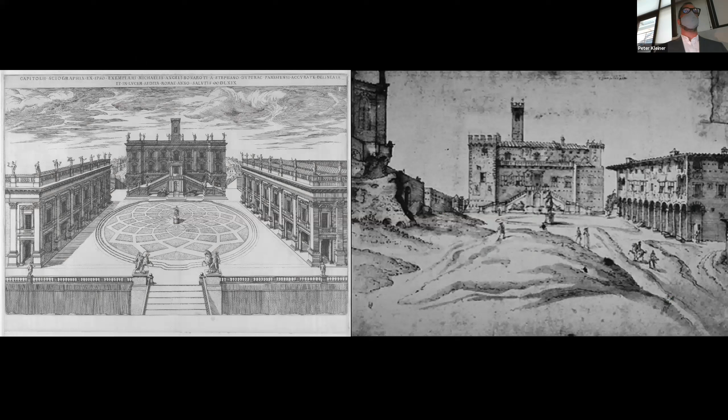Some quick internet research reveals this concept isn't new. Apparently Leonardo had a similar thought, or maybe it was Michelangelo—the internet hasn't decided quite yet. But my money's on Michelangelo, and even if he didn't say those exact words, he did it in almost all his work. Whether creating an illusion of a perfect Renaissance environment at the bizarre existing buildings of Capitoline Hill, or creating one of the most memorable staircases in a leftover space in the San Lorenzo complex, or creating David from a block of marble rejected by other sculptors as unworkable, he's truly one of the greatest architects in history.

He knew the constraints of budget, site, existing buildings, and client vision, and how to make those constraints truly great art. So there are seven themes we're going to review tonight: site, existing buildings, budget, process, sustainability, regulations, and program. So let's start with site.

We encourage everyone to always draw the context. If you don't design with your site, your design is incomplete. In fact, it can really be the key to your whole project—if you don't have a spectacular cliff in Capri, that is.

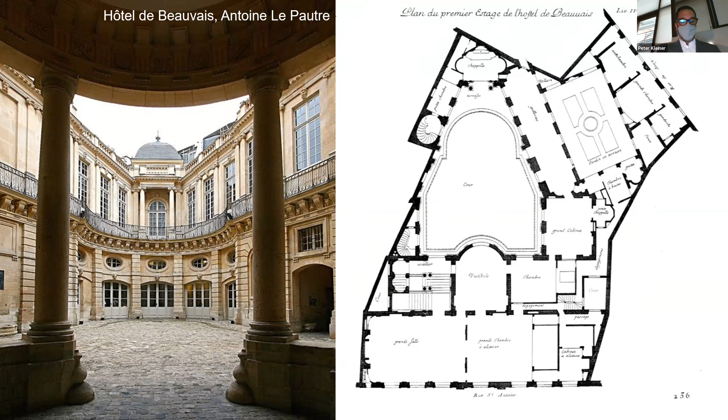Even odd sites are a great opportunity for design. The Haussmann plan in Paris created dozens of odd-shaped sites throughout the city, and Antoine Le Pautre's plan uses that odd shape as the driver to create brilliant architecture.

While we're in Paris, we wanted to focus on the Maison de Verre, one of our favorites, by Pierre Chareau. The site is small, within a courtyard, fairly concealed from public view, but it contains one of the most memorable pieces of architecture from the early 20th century. The constraint was that it was in an apartment building, but they didn't own the top floor, so they had to support that floor during construction.

The MIT library, one of our earliest projects, was in fact our second built project. It was for the art and architecture library, and it was driven by the constraints of the site. After an exhaustive search for a site on the MIT campus—something like 17 studies—the best and only preferred site was the one on the facade of the architecture building.

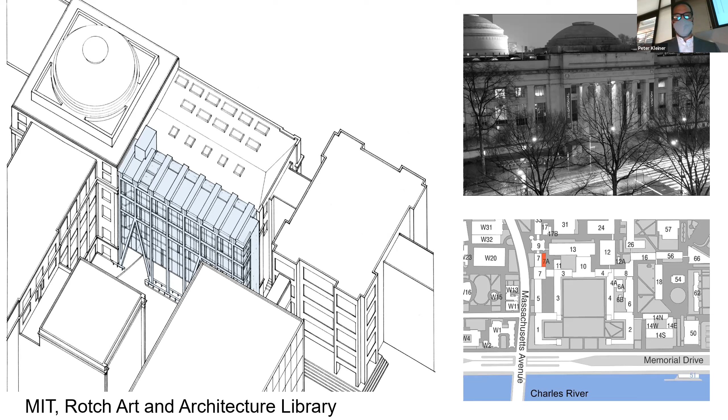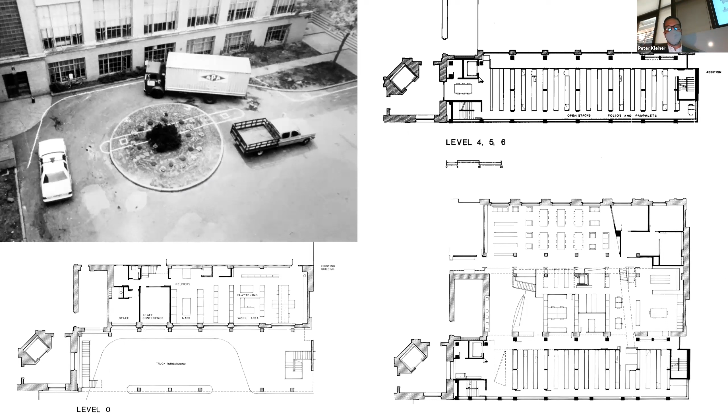That site turned out to be the service and delivery zone for most of MIT's connected buildings—the truck turnaround MIT used for deliveries for everything going on there. I don't know that I knew MIT had a football team, but they actually did ask the coach and his team to draw in chalk where the building would come down, to see if it would actually work. It did, so they went forward.

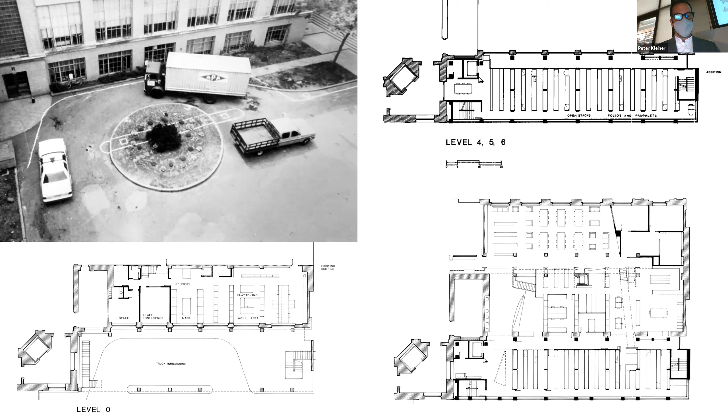The site's located at the rear of the domed main building on Mass Avenue. It's the smaller dome of the two, and the design had to keep this path and truck turnaround open after construction was complete.

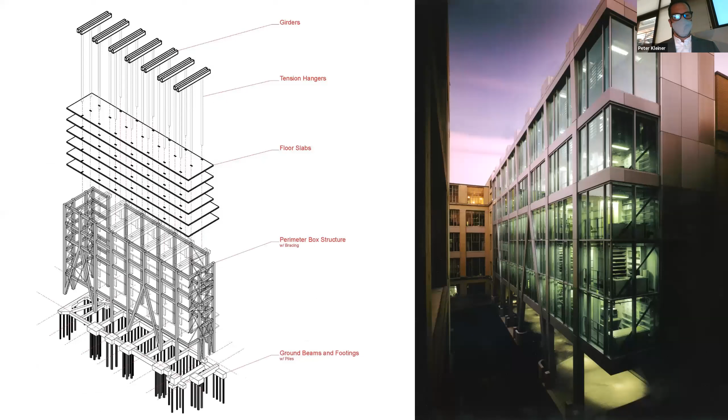When we thought about it, the building had no other site per se. We thought if we could hang the building from the roof with only a few columns touching the ground—something like 10 locations—we could solve the problem and maintain MIT's treasured delivery zone. So the solution became a quasi-suspension bridge.

Another project I'll talk about is the McCoy Federal Building. There are many unique aspects of this project, but I want to highlight some of the constraints of the site that really drove our design.

The existing building had an unwelcoming civic plaza in front that eroded the edge of Capitol Street, the main street in downtown Jackson, Mississippi. Our new entry pavilion was to reestablish that edge of Capitol Street, create a contrasting architecture to the harsh existing federal building, and create a more welcoming landscape.

This site area we had was in fact very small, and the pavilion was a small part of the project, which was a full renovation of 425,000 square feet of the federal tower.

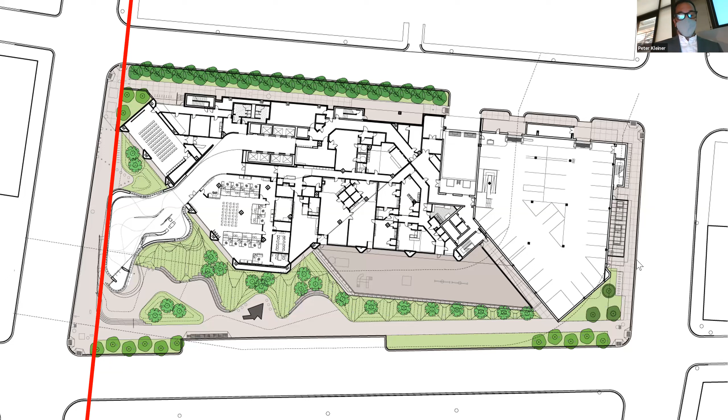So not only was the site small, but there was another catch. The Army Corps of Engineers had a stormwater culvert that ran through the entire site, diverting a tributary of the Pearl River through the downtown.

Early on, we did an analysis and determined that a small column could rest on a center bearing wall, and the existing capacity of that storm culvert could easily support that column—about 3 kips, not a big load.

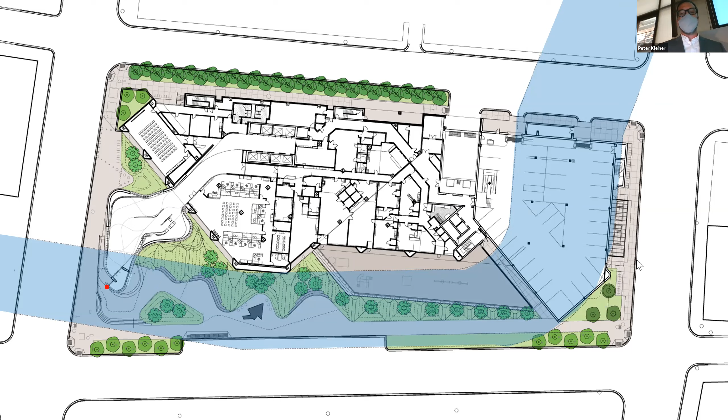During construction, we were advised that the federal government was not going to seek approval for that column, and we didn't have it. So we had about 30 feet of our pavilion left unsupported.

So the contractor had a brilliant solution. He said, just cut it off and redesign the pavilion.

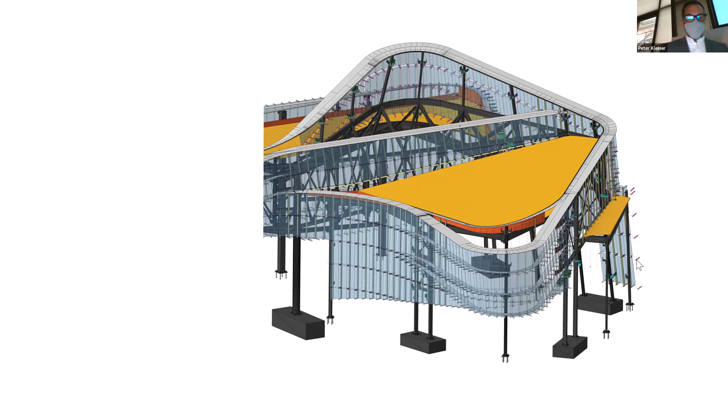So we sat and thought about it, and I looked at the framing model and called our structural engineer, Anton Nelson. I said, Anton, I paid a little attention in my structural engineering classes, and I'm pretty sure this truss we have is really only about a third of the cantilever for the full backspan. And furthermore, this whole thing is welded, so it's a full moment frame. Can't we basically treat this like a race car chassis? It's a welded frame—we just have to support it up a few dozen feet in the air.

So like a good engineer, he listened to me, then told me I was absolutely insane and hung up.

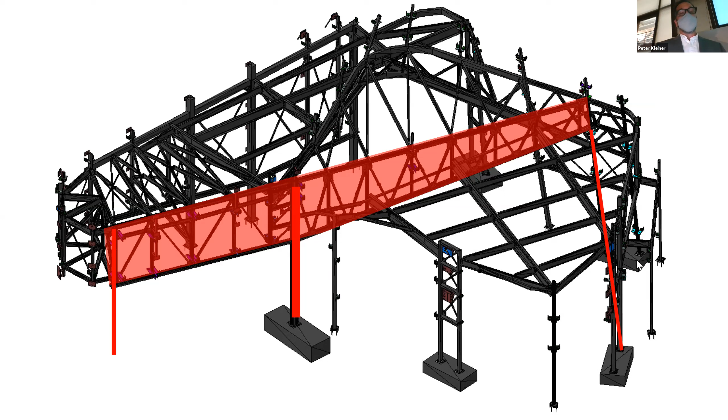But like a truly exceptional engineer, he called me back and said, you know what, I looked at it and your idea works. What we can do is use this wall on the other side too, to reinforce and make that a truss so we can fully support this 30-foot span without that column.

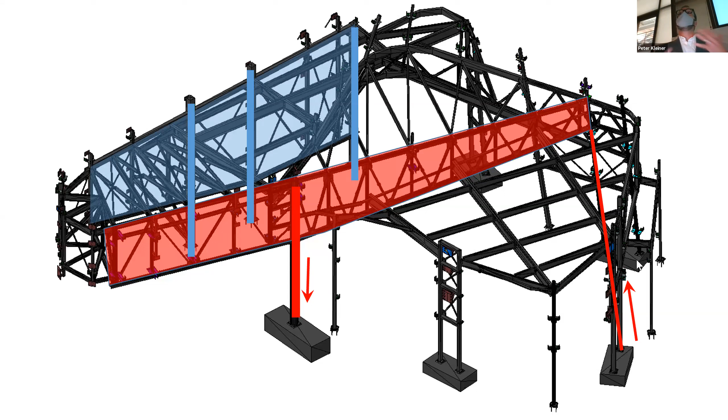In fact, we're not actually increasing the load of steel. Some of these columns are actually going to act in tension because of the overturning of this whole roof form during certain wind conditions. So the project went ahead—built as originally intended, just without a column.

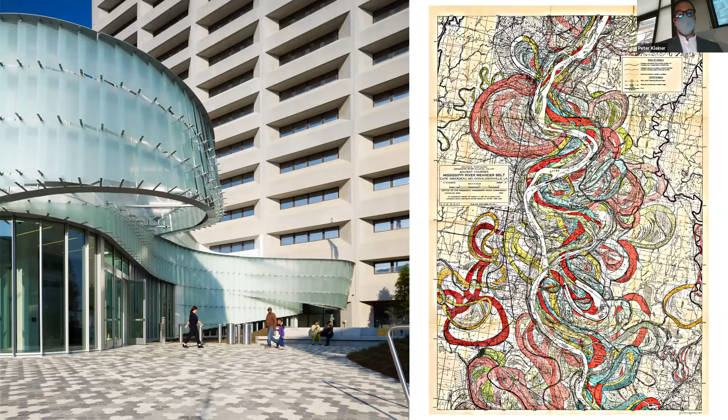It's something that we're very proud of.

And in fact, there's another aspect of the site that we used to provide inspiration. As we were designing it, we found these beautiful drawings done in 1944 showing the changing contours and meanders of the Mississippi River over geologic time. We used that as inspiration, noting how the river has been around for millions of years and yet still hasn't figured out how to go in a straight line.

It constantly changes and weaves its way around obstacles, and somewhere there's probably a metaphor in there for the federal government, or maybe just our design processes.

So much of our work at Schwartz Silver is to existing buildings, and we are really well known for transforming existing buildings.

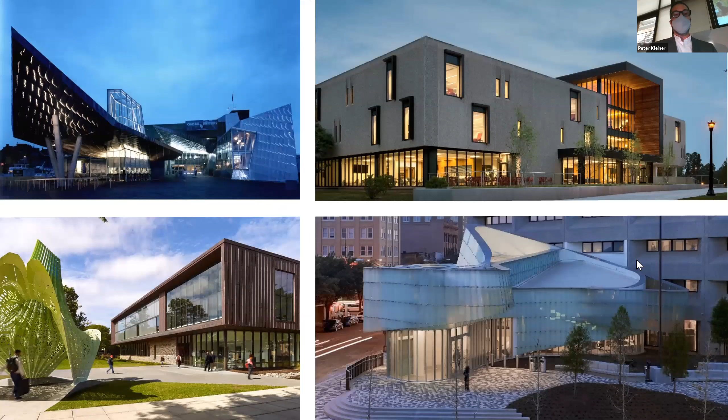There will be, in your careers, more existing buildings to work on than new construction. So it's a good thing Roger has a robust historic preservation program.

In many cases, we work on buildings by famous architects, such as H.H. Richardson, Charles Bulfinch, Guy Lowell, or in this case, McKim, Mead, and White at Brown University. Our philosophy has always been to respect the inherent character of these existing structures and then look for opportunities to add a layer of history with new modern interventions.

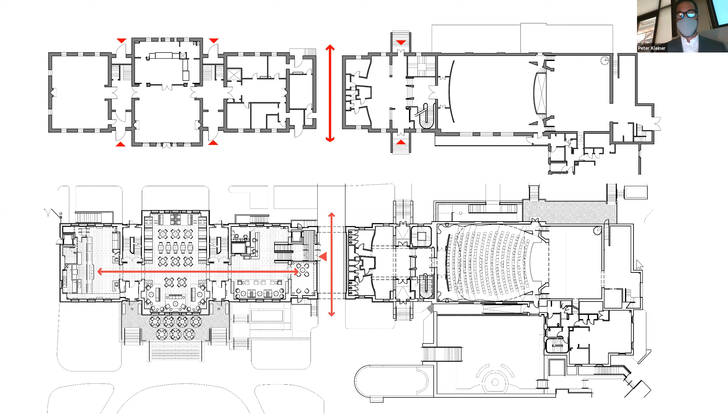At the campus center, by keeping a suite of spaces enfilade, we shifted the axis in the existing building from the center line to just off center. And this allowed us an opportunity on the other end to change the way we could experience the building on campus.

This is one of the main entrances to the Brown campus, and there is a connecting path right through the center of the building, which before we started was an unremarkable brick arch passageway. We saw this as an opportunity to connect the internal part of the building with a new glass entranceway, and therefore transform this entrance to the building and this entrance to the campus with something more light-filled and modern.

The Historic Preservation Act was created in 1966. It protects buildings that are 50 years old and older. And with some irony, we're now at the point of protecting some of the most divisive designs that were the reason for that act. Brutalist designs of the 60s through 80s are now historic buildings. Some people like them very much, such as us, but for most people, they consider these buildings to be ugly.

The stairway was transformed with the light monitor from above and changing some of the texture, including a mural that included quotes from a commencement speech from Kurt Vonnegut that we found very inspirational. Those dark spaces around the interior became light-filled study rooms and collaboration spaces for the new library.

So budget is something that we have to focus on in all of our projects, and it's something that is not often talked about, we feel, but it's something that is really critical to making your projects succeed.

So the National Music Museum is a project which has been in the office for almost 12 years. Architecture is not for the impatient.

The museum is a small building on the campus of the University of South Dakota. It was originally a Carnegie Library. Like many things in the Dakotas, it's difficult to get to, but it has one of the most amazing collections of musical instruments in the world, something like 30,000 objects.

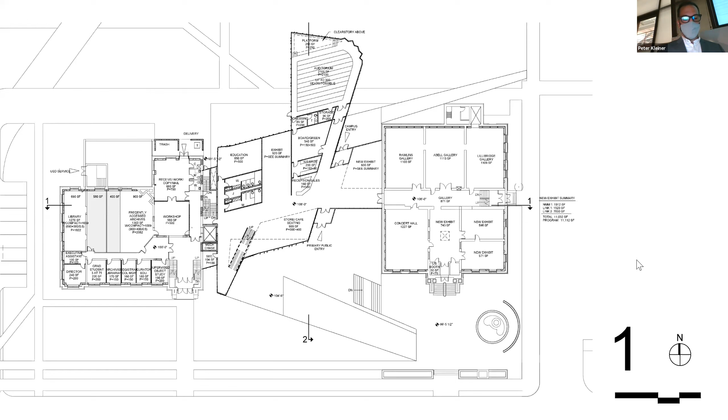After 35 years, it was running out of space. The board's aspirations were for it to be a world-class destination museum. Initially, we developed a design that would maximize the existing site by connecting to another campus building on the left. The goal was to create a design that would generate donor interest in a national fundraising campaign that would span from coast to coast. The initial budget was $17 million in 2010.

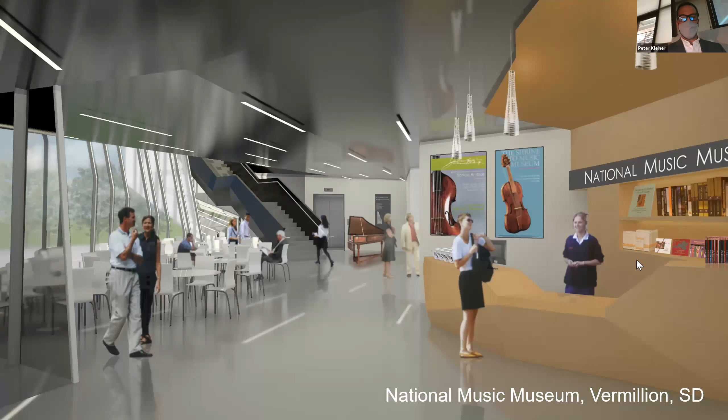But initial fundraising expectations proved too ambitious, and we simplified the design to stay within the limitations of that budget, which was now reduced from 17 million to the $4 to $6 million range. What do we do?

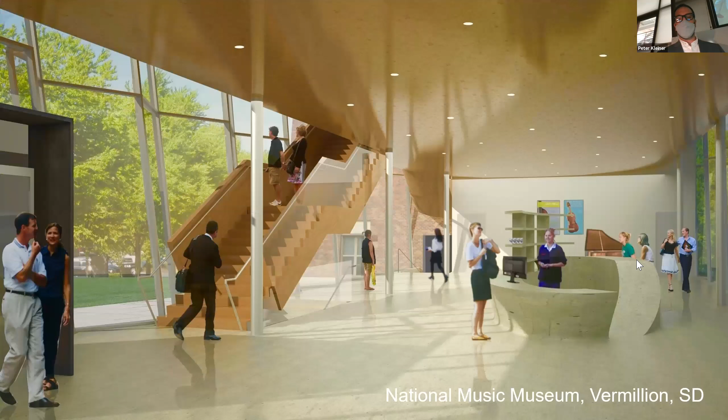Program and square footage was cut to a minimum. The building still connected both buildings on the site, but it had shrunk to a width of 21 feet. It had to become a beautiful lobby/corridor with linear galleries on the second floor.

A few more years passed. We liked it, but as it turned out, the university didn't want to build just a corridor.

So more time passed. We're somewhere around 2017 now. A new director was named, and finally, the arts faculty created a very focused building campaign, relying on money from state and federal grants, as well as a more realistic fundraising effort, with an expanded donor base and a special donor.

We had another more modest but realistic budget of $9.5 million to work with. By the way, this includes as much as possible renovations of the exhibits within the existing building.

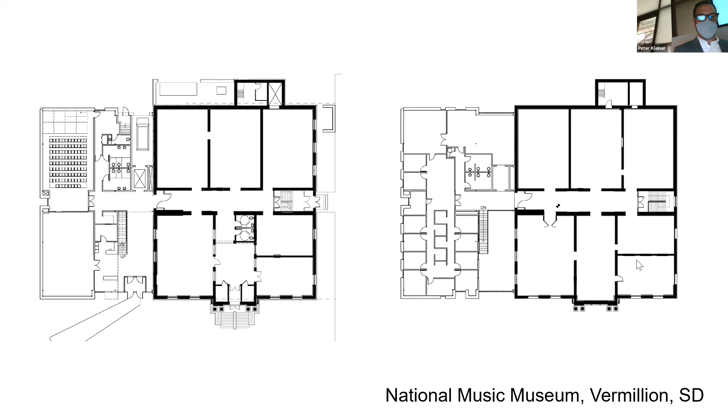10 years later, the new design was smaller than the original, but bigger than the corridor scheme 6 years out. It did not connect the two existing buildings, but instead found storage space for the collections off-site. It proposed renovating the existing museum galleries, and that's now underway. And the addition is now complete with offices, conservation spaces, a new lobby entrance, a new large traveling gallery, and a new 130-person recital hall, all scaled down from the original $17 million design, but consistent with the original program for the museum.

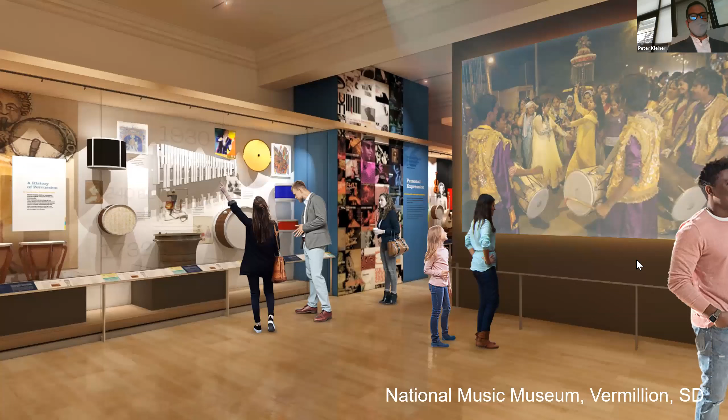That's the new traveling gallery. And actually it opens into the recital hall.

At this point, I want to pause and address the question you may be thinking: is this a disappointment? Well, 12 years later, wouldn't you rather have the original larger project in your portfolio? Actually, no. The goal is to have projects built that benefit our clients. The larger project would have been a financial burden for the institution, depleted their endowment, and kept them from their mission of preserving the instruments.

At the end of the project, all the lost designs and war stories disappear, and you have a building, and that building needs to stand on its own and be something an owner can maintain. If you don't accommodate the budget constraint, you'll only have beautiful renderings.

So in our studio, we talk a lot about process, and this is not so much the design process, but the outside forces of process that impact us. Now, as a student, you may be talking to colleagues outside the architecture program, commenting on how odd the design crit is. It's truly something unique in academia that doesn't really exist outside of architecture schools.

When I was in school, the design crit was nerve-wracking. It could be brutal and sometimes cruel. Exhausted students, hadn't slept in days, wept. And you may say to yourself, how does this prepare me for working in the office when I graduate? I forgot to tell you that the public process is worse than the academic design crit sometimes.

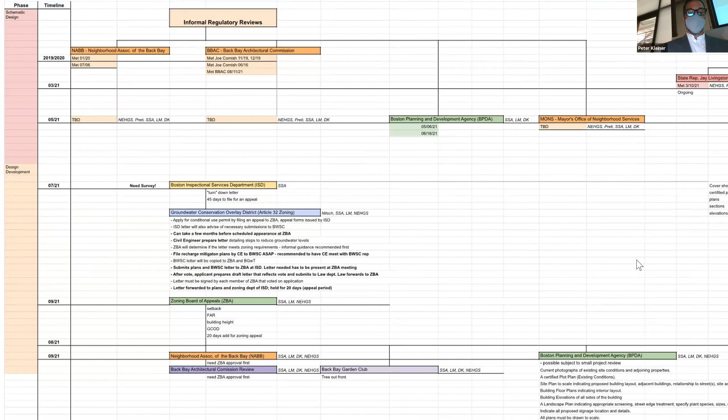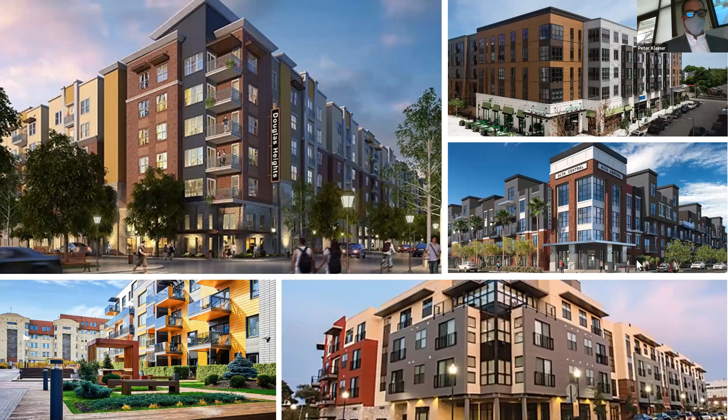There's an old expression that a camel's a horse designed by committee. And I feel that you don't have to look too far today to see many architectural camels that are the result of a design-driven process through a committee. The goal of many development projects is to get through as quickly as possible, and compromises are made all the time.

Worse, I think designs are starting out as compromises to address all the things people ask in meetings. Can you break down the scale? Can you change materials? Can you add some brick? Can you add bays and relate it to the context? I feel this is really unfortunate. I've often said you've never heard people complain that there's too much red brick in Beacon Hill. We've forgotten that we don't need to use every material in our material library, and that complicated designs are not necessary to create great architecture in great cities.

So for me, one of the first projects I worked on at Schwartz was the Hyde Park Library, a beautiful Carnegie building in a neighborhood of Boston, which happened to be Mayor Tom Menino's neighborhood at that time, where he grew up. So it was something that was very dear to him.

So very early in the process, we were evaluating 3 options. One was 2 additions on the side of this historic building. Another would create a nice garden with a new volume connected to the historic building. And the other was pretty much a simple extrusion that complemented the existing building massing. I remember a number of people in the office really loved option 2, seeing great possibility in creating this garden and this beautiful new element that complemented the existing building.

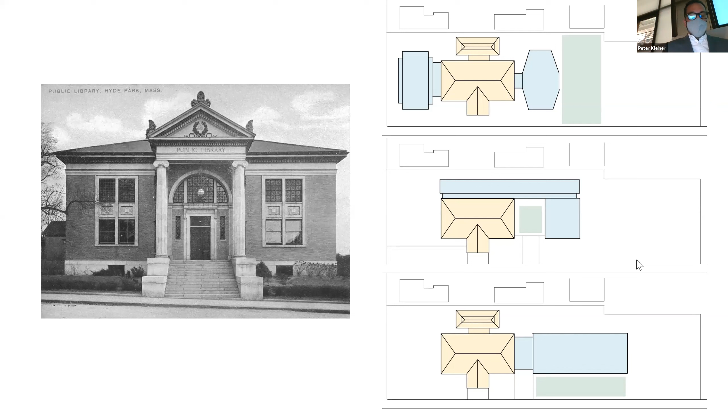One of the principals in the office said option 3 is the only option that's going to survive this process. He casually added, if the AIA had a competition, option 3 would win. The AIA awarded this building a National Honor Award, one of its highest honors. The reason it was able to be built is that it had a very clear intent for what the building needed to be, and it allowed everyone to be satisfied.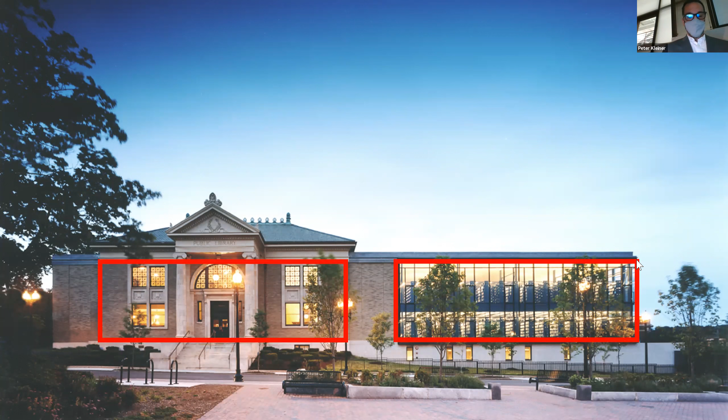It allowed a plan that could accommodate a functioning library, satisfying the needs of the librarian and the staff. The massing of the modern glass box related very simply to the massing of the existing building. The datum lines tied the existing into the new, and the windows of the existing building were related to the proportions of the windows of the curtain wall. So it was very easy to satisfy the historic commission with this type of logic.

The interior atrium space allowed the existing historic reading room and the new reading area to connect with minimal staff supervision. And ultimately, the garden that was part of the scheme, incorporated in the back, was a focal point at the end of the children's room. It's one of the best used spaces in the Hyde Park neighborhood.

Another project that went through the gauntlet of the public process is this recent project for the Medford Public Library, and it's a slightly different story. The existing library was an unloved 1960s building, and our design provided a new, efficient floor plan that would maximize the use of this site.

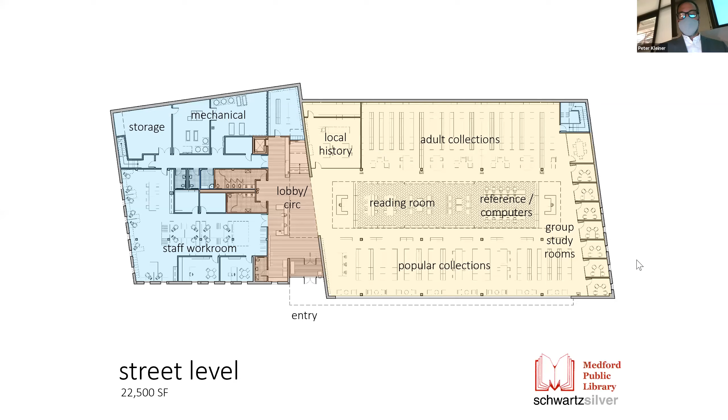During the concept phase, we had some initial concepts about how this would be formed, but it was really left to schematic design to further flesh this out. It became very clear that the committee had no love for the flat roof of the existing building, and their one request was that this building have nothing like a flat roof.

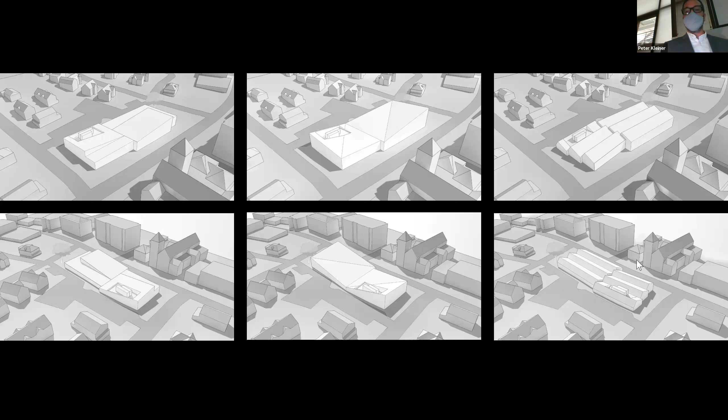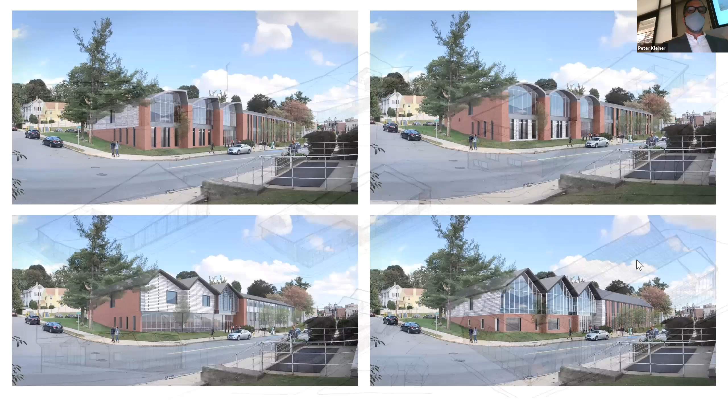So we started looking at many options for how to do the massing of this. That continued for several weeks. We wanted to look at options that included the shed roofs that were requested, as well as gable ends, but also some other forms. In the end, what we really wanted to do was create a scheme that could celebrate some of the heritage of the city of Medford, which is known for brick manufacturing and the construction of clipper ships. So the repetitive roofs started to reference some of the manufacturing buildings with repetitive roof forms, but also alluded to waves and sail forms.

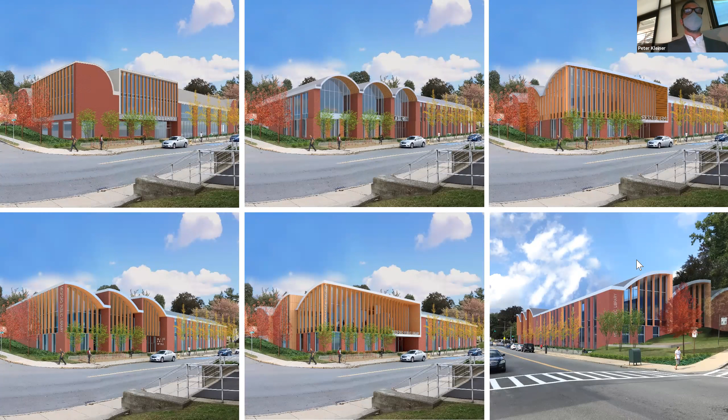Getting to consensus can be difficult. Oftentimes it takes many iterations, continually looking at and refining these options. But we created a system of roofs which creates rhythm and order on the exterior, but also allows for skylight monitors to bring light into the upper floors of the library building, providing abundant daylight.

So this is the final rendering that was developed, showing that repetitive roof form scheme of arches, and you can see some of the skylights in the interior. We're very pleased to say that this is almost completed construction, and the client is very happy with it. We're excited for that to open.

Those roof forms were also something we used to determine how to make that work for solar panels, so this library will be one of the first net zero libraries in Massachusetts, something we're very proud of. And that leads us to our next point: sustainability.

Sustainability is more and more a driving force in our projects. It's something we try to do in almost all of our projects, to the greatest extent possible, but it's rare that we have it as the primary driving issue. The town of Wellesley had that as a goal. It had a requirement for a new town hall space, and its primary goal was for this building to be net zero, so we developed this project to be net zero.

In order to do that, there are many things you have to do to make the building reduce the amount of energy it uses and actually generate the energy it needs on site. So this project has a very compact volume. It has an incredibly thermally efficient envelope, which also means you have to reduce exterior glass.

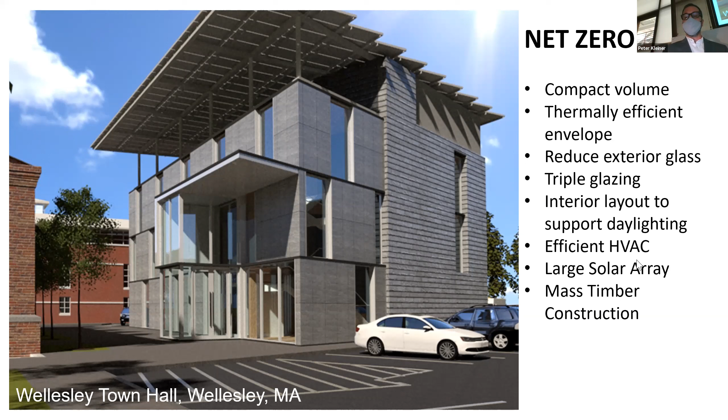But as we progressed, we decided we can go a little better here. So we can go for a project that uses zero fossil fuels in the transport of materials and zero material waste. We can work to make sure there's zero maintenance and zero operations costs, and we can have one of the lowest energy footprints of any building in the state.

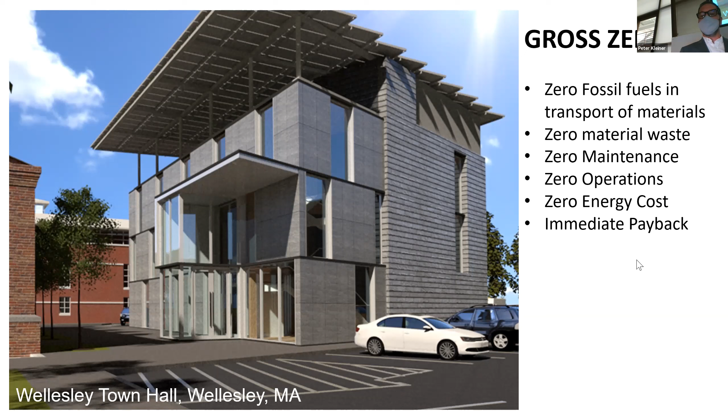The town had another town hall project ongoing at the same time, and we convinced them that we didn't need that new building, at least not quite yet. The most sustainable square footage you can build is the square footage you don't build. So we convinced them that by renovating their town hall project, which was ongoing, we could actually reduce the energy footprint of the town more than by building this net zero building.

We also analyzed the existing meeting rooms of buildings throughout the town to determine that they didn't need additional meeting space in the town. This took a very careful data analysis effort to determine the town's true needs for meetings.

And then when we designed it, we made sure that we could take this existing building, which was inaccessible, and provide accessibility. I think this is something that we find is really important and undervalued: making sure that our projects provide universal design.

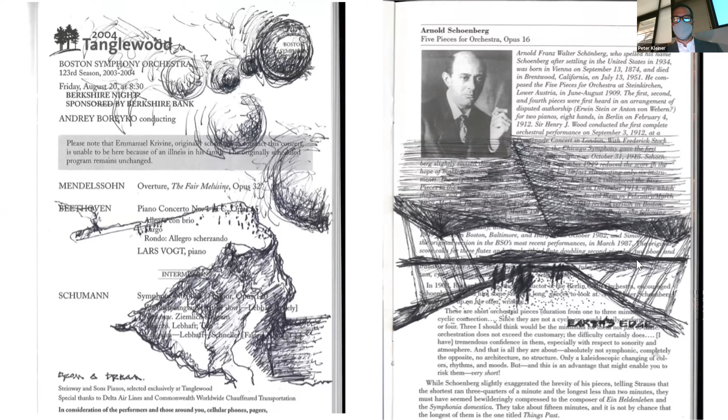So I made a quick Lego model and started working on the plans. The house was to be entered from the top of the hill and would be held up mid-span by a stairway toward the ground.

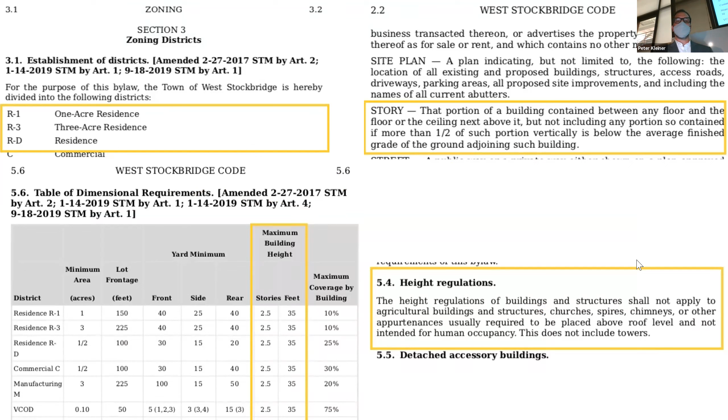I then looked at the zoning regulations. The height of the building was limited to 35 feet. And although I thought of the house as only one story, that was not zoning's definition. The hill was sloping quickly, and the height to average grade would have been over 10 feet higher than the zoning allowed. The design had to be rethought.

If the upper half of the house could follow the slope down the hill, then the lower half of the house could still stretch out horizontally and become the living, dining, kitchen, and main bedroom platform. The height of the structure could be 17 feet, and it would cantilever almost that same distance above the ground, putting the house within a foot of the maximum height allowed.

The form of the house became a chevron, and in a real sense, the form of the house was generated by the zoning regulations.

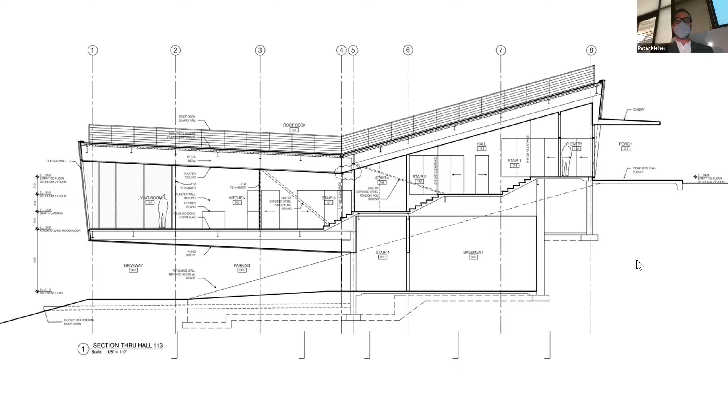Program is a driver. I don't think that we normally think of program as being anything special, but it really is a constraint. At the same time, it's also a liberator and a generator of design.

The Shaw Center is a mixed-use cultural center on the Mississippi River on a prime site in downtown Baton Rouge. Before it became a multi-use theater, a contemporary museum of art, multiple restaurants, and retail stores, it was a parking lot, as was a large portion of the downtown at this time.

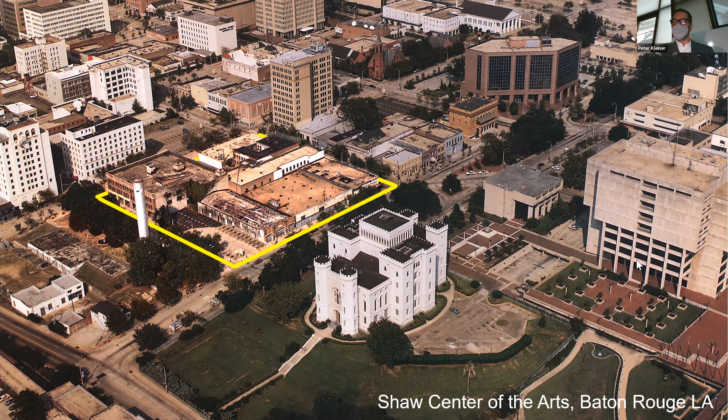The downtown development plan had designated this block to be the catalyst for rebuilding the city, starting at its center. And although a community theater was an important piece, it needed more.

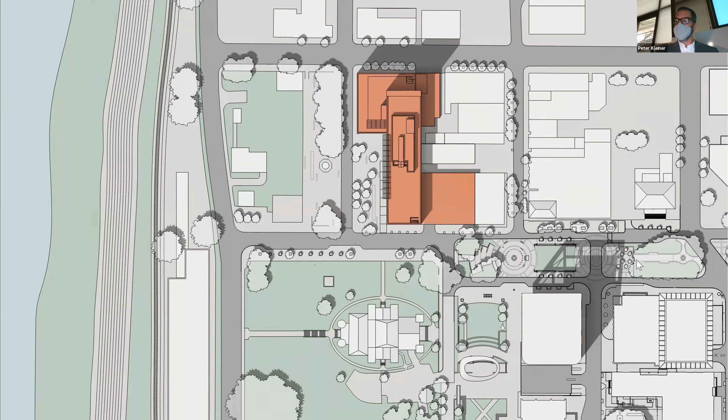Concurrently, Louisiana State University, with its 35,000 student population, was planning on expanding the university's art museum and visual arts program. As the architects for this project, we were chosen probably about a year before that. We had just gotten approval for schematic design.

Within a week, I received a call from the university provost asking if we thought we could move the museum and fine arts program downtown to the parking lot, which was designated to be the site of the new community theater. I thought this could get complicated. But since we had no choice in the matter, we decided to look at starting over in a positive light.

We thought the only thing better than building would be to keep designing something that would be larger and even more interesting. What could be better for an architect than to design two major projects combined into one? So we kept that sort of positivity as a theme throughout the entire project.

Once we realized that we didn't have any choice, we looked at everything positively. We looked at budget cuts positively. We looked at cutting the length of the building positively, and in fact, we kept thinking, gee, we're designers, we can keep on designing as long as they ask us to do things, which changed the building.

The question is, would it still be a success? I think we came to the answer by working on this.

You have an arts program with arts classrooms, arts faculty offices, and an art gallery for the university's art program. And you have the ground floor uses that activate the city.

A city room, basically the combined lobby for both the theater and the museum, a private art gallery, restaurants, and rooftop views of downtown and the Mississippi River.

How do you put this together so that the whole is greater than the sum of the parts? You can see the pieces here, how they fit, like a puzzle. As Peter said earlier, we love puzzles, and we love urban puzzles particularly.

So the fly loft in the theater becomes kind of a support for one end of the museum. The museum appears to cantilever over this historic building called the Auto Hotel. It's actually considered a historic building in Baton Rouge because it was built in the 30s.

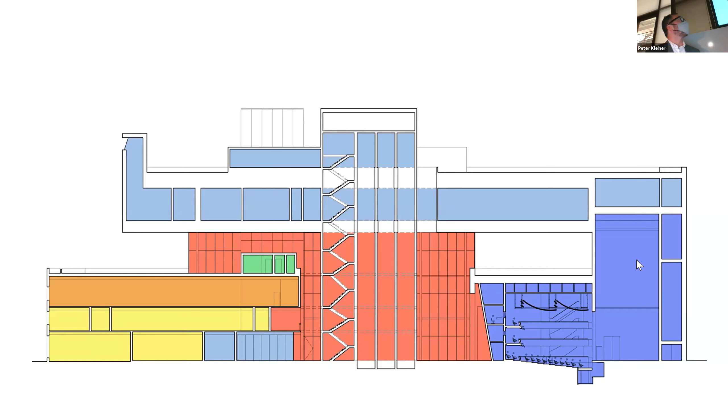The wrinkle there was that actually, because it was a parking garage, it wouldn't hold the kinds of uses needed. So 5 feet inside all of the surrounding walls were cut away and replaced with flat floors. So this parking garage actually became a building that was useful for other than cars.

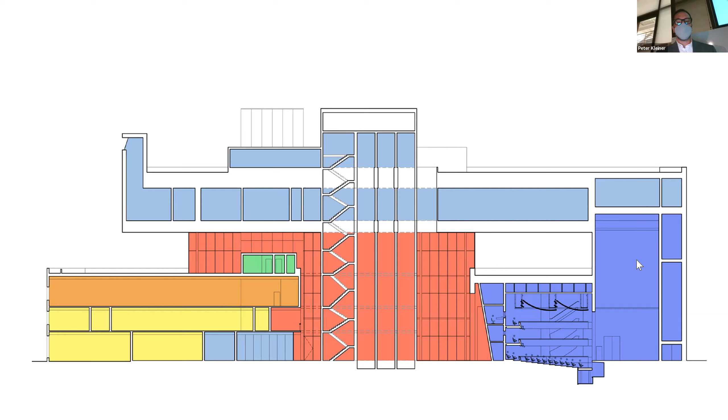So those are the pieces which actually combine. Originally there were two groups of trustees, and the two groups, one represented the theater, the other represented the museum itself, and actually there were two other, I guess, concerns.

Concerns that the city itself needed to be fed with public areas and spaces for general sort of urban development.

What happened was that we showed them designs originally, which were for the trustees of each of the two major parts of the project, the theater and the museum, stood next to one another, and they realized that each one was smaller than the whole, and so they asked us to put them together and combine them into one. So this is the result.

Ultimately, it did win a National Honor Award in 2008, and I think that was by treating the program and changes as positive things that can happen.

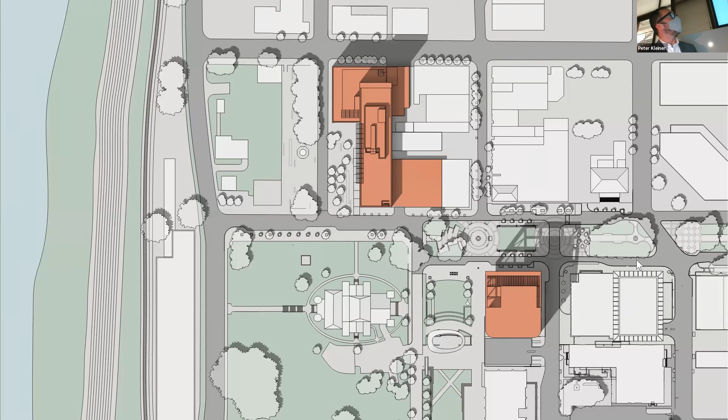Another building in Baton Rouge, diagonally across the street. This is the River Center Library.

There's a little mystery about program, since it's the basis for most architectural projects. The alchemy is how the program is deployed, combined with the client's vision about how the building will be used. Program is the basis for design discovery, we found out, and program distribution was the primary basis for the design of the River Center Library in Baton Rouge.

Here, as distinct from the great Seattle Public Library, book storage was not central to the design. Sure, access to books was important, but equally important were the community aspects of the program, which included both outdoor spaces and climate, all of which gave us clues to the building's form.

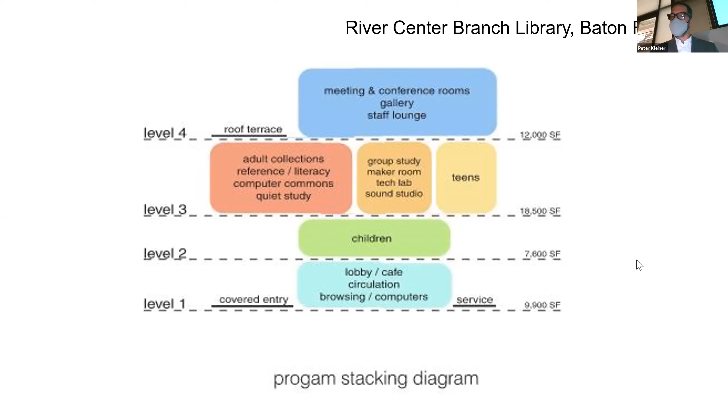The librarians were interested in a clear reading of the distribution of uses and age groups in the building. So the entry and the first floor was for everyone. The second floor was for children. The third floor was for teenagers and adults. And the fourth floor was for meetings and parties.

This is a public library, so I think the definition of library has been evolving and changing. I see it, and saw it, somewhat as kind of an adult community center. Really a student center, kind of, but for after graduation.

The square footage requirements were quite varied and looked something like that when they were stacked. So when they were stacked, you can see they're all different sizes.

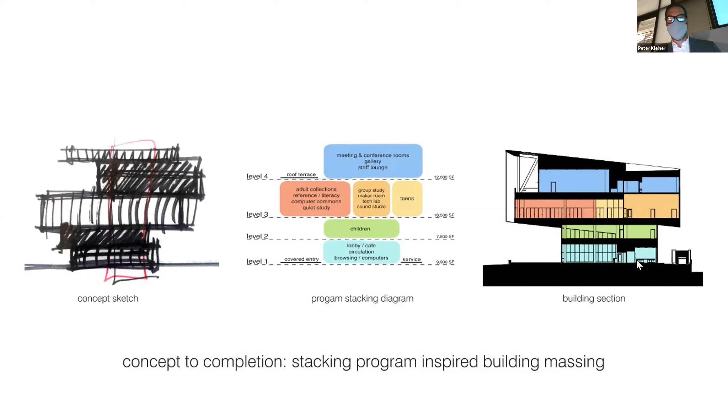Nine months of the yearly climate can be very hot, humid, and rainy. There's a lot of outdoor music on the streets, and in fact, the main public plaza is right outside the building's entry - you can see that on the first floor. This led to providing a very large public canopy for shade during concerts, gatherings, and a public cafe, which is also part of the library.

The fourth floor, which recently became a public meeting space for City Hall, would also be a great place for parties, weddings, fireworks displays, Mardi Gras, and for city and river views in this otherwise very horizontal urban environment. No mountains in Louisiana.

Other details of the building were designed to soften glare, reduce heat gain, and provide shade and urban scale to the building mass, to call it out as a public building.

Finally, the library takes its place in the urban landscape on a main city street between two city parks, between one contemporary and one historic government building, and diagonally across from the Shaw Center.